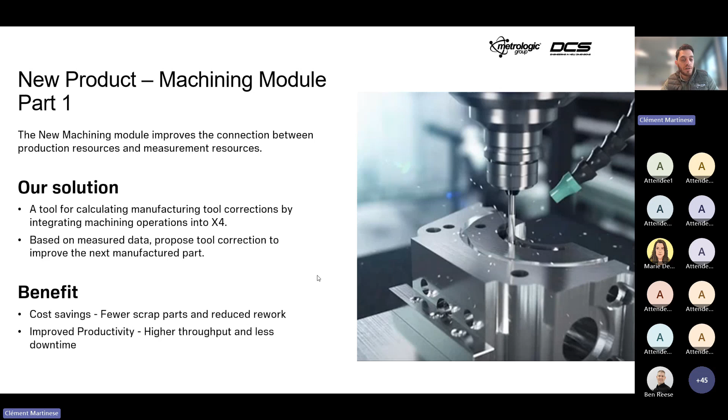Now the machining module. What is the target? The target is to improve the connection between the production resources, the CNC machine, and the measurement resources, the CMM. How do we do this? We are now able to define machining operations in Metrolog X4, called OP - it could be shouldering, drilling, planar facing - and we will be able to set the axis to apply this correction. Metrolog X4 will calculate the tool corrector to apply for the CNC machine for the next part. So the target is to improve your productivity and reduce the rework of your part.

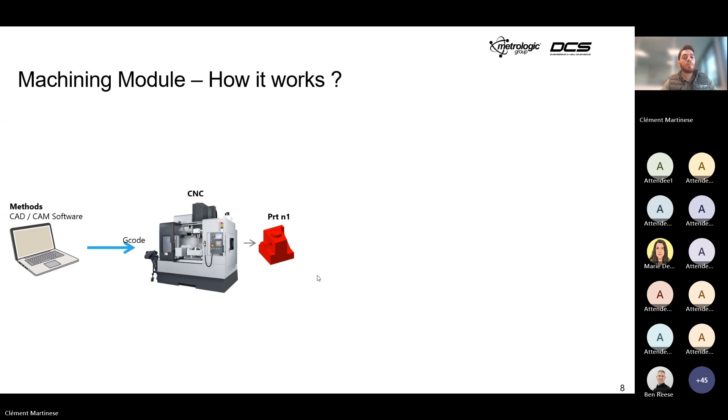How does it work? The first step is to create the part with the CAD design. We send all the information to the CNC machine. The part is produced - we have part number 1, in red. We have to control this part with the CMM and Metrolog X4, so we send all the information about the CAD design with the PMI, with the characteristics to control. The first part is bad.

It's not a problem. Now with Metrolog X4, we're able to calculate the tool corrector, maybe to change this surface with a shouldering operation, and send it - today manually - to the CNC machine to produce a new part, part number 2, with the tool corrector applied. The next step is to control part number 2 with Metrolog X4. At this point the part is good, and you can continue to calculate the tool corrector at any time and send it to the CNC machine to boost your productivity, with part number 3, part number 4, and so on.

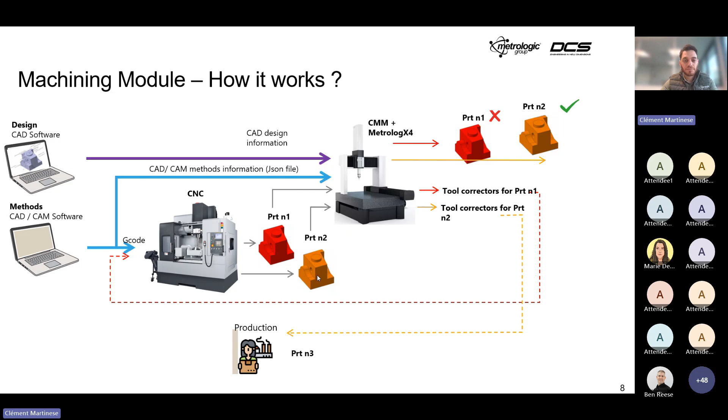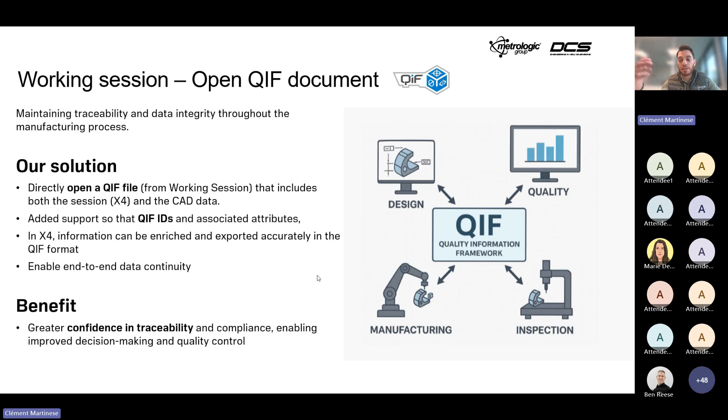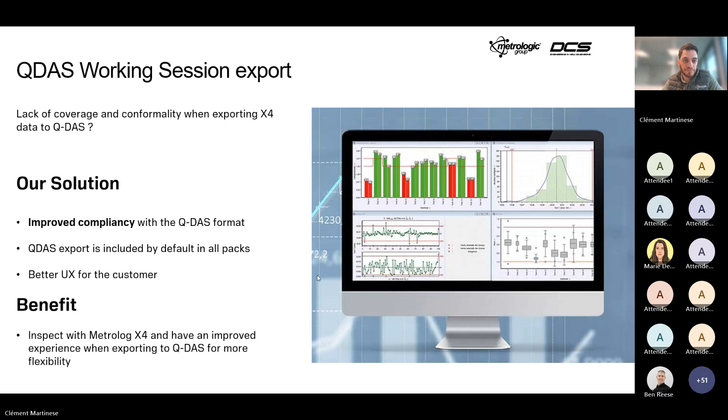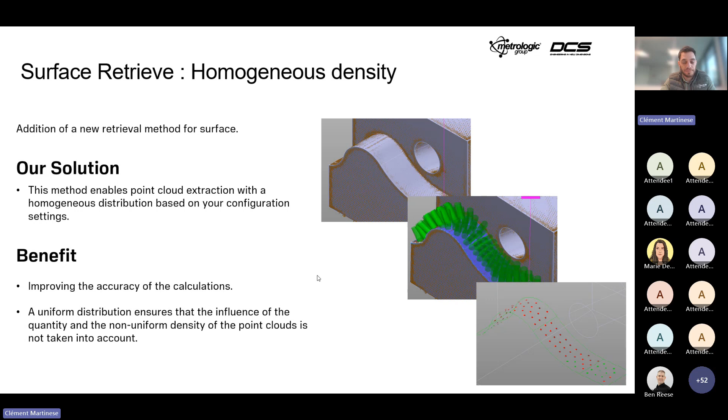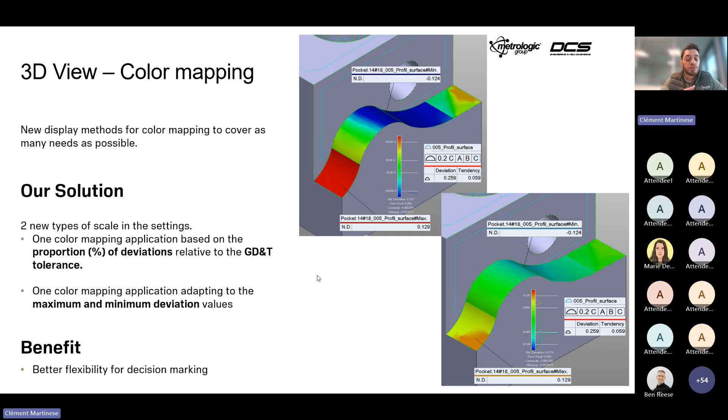Now about the color mapping, we had the possibility to select a new scale for the color mapping. Before, this kind of scale was available for the features only, but now we have the possibility to add it for the GD&T tolerance. So it's based now on the proportion of the deviation relative to the GD&T, as you can see in the first picture. The second scale is really a new one. When you want to identify the worst deviation of your tolerance, you can select a new maximum and minimum deviation value, and the scale will automatically set on the max and on the min, as you can see in picture number 2. So it's new flexibility for your decision making.

We stay on the color mapping, and now we add 2 new colorization modes in the settings. Before, in V23, we had the CAD colorization, the point colorization, the vector colorization, but now we merge the color mapping with the point, and the color mapping with the vector deviation, with the color mapping. So we just merge some possibilities into 2 new cases.

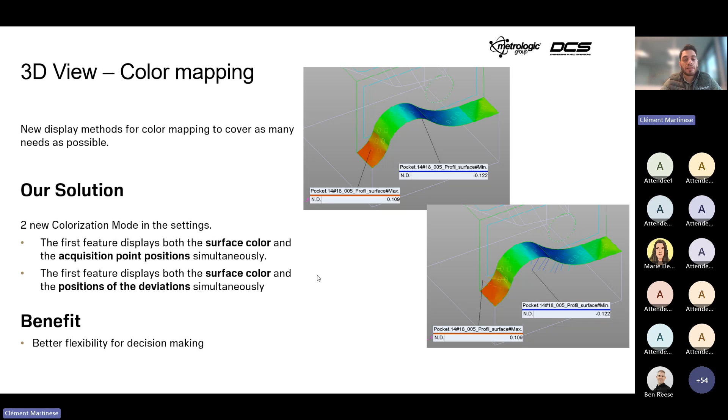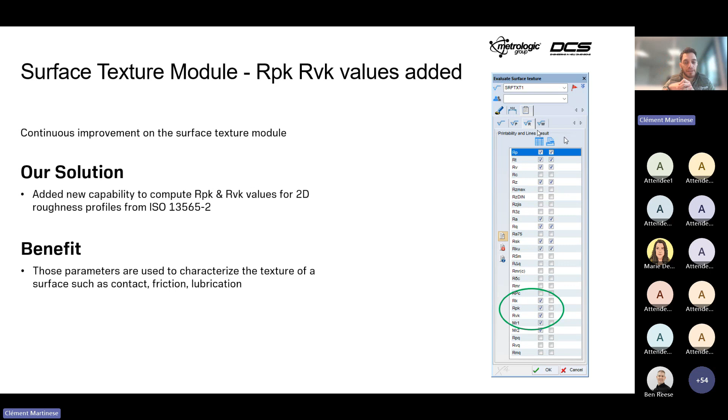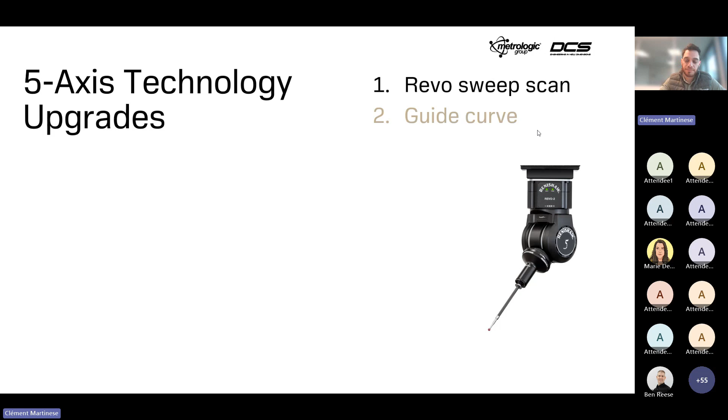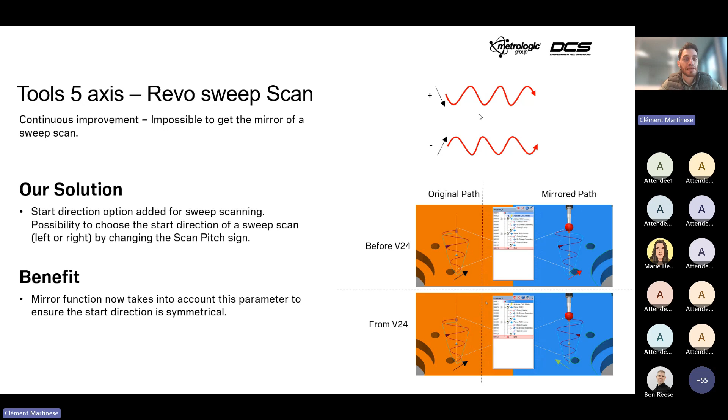Now focus on the 5-axis technology upgrade. We had no possibility to create the perfect mirror of sweep scanning trajectories before V24. As you can see on the first picture at the top, the trajectory was the same. But now, thanks to the pitch sign, it's possible to create the perfect mirror of the trajectory. It's a perfect way to process if you want the real mirror of the specific principal program. You can see at the top the version before V24, and below, the version from V24, where you get the perfect mirror of the sweep scanning trajectories.

For guide curves also, as you can see on the first picture, we have what we call the butterfly effect. It was complicated to generate perfect trajectories for blade inspection, for example. But now, thanks to the new algorithm, it's possible to smooth the probe movement, so you get a perfect trajectory, a perfect line for your blade analysis. It's useful when you want to create perfect trajectories, and you will remove what we now call inside Metrolog the butterfly effect.

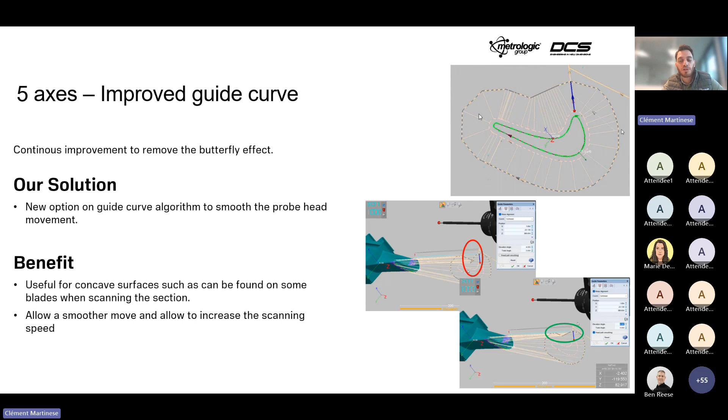Now some improvements about the hardware interface, and we'll focus first on I++ management. As you know, it's possible to connect Metrolog X4 with various types of I++ servers. But now we offer the possibility to select the server type. As you can see on the picture, the Renishaw UCC server - you can connect it, and you will get only the head possibility to connect to the UCC server, so the Revo 2, for example. But if you select the Zeiss protocol, for example, you will be able to connect only the VAST gold, for example, but not the Revo 2. So you have a filter according to the selection.

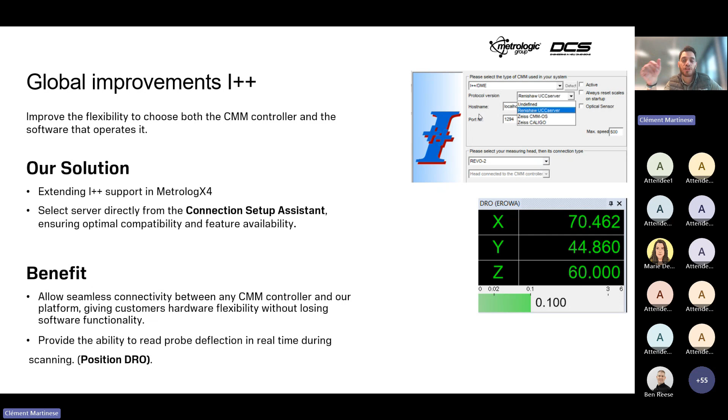We also now have the possibility to read the probe deflection in real time during scanning, thanks to the DRO. So it's a new possibility to adjust and see the real deflection of your probe thanks to the DRO.

About probe management now, always in the I++ context. As you know, before V24 it was sometimes complicated to create a tool with an I++ server. Sometimes you had to change the probe file XML, so it was a long process - first define, then change the probe file. Now, forget all those steps. You can define the tool directly inside Metrolog. You have better visibility of each probe depending on the tool, and the possibility to add a tool, define a tool, modify a tool in X4 without changing any information in the probe file.

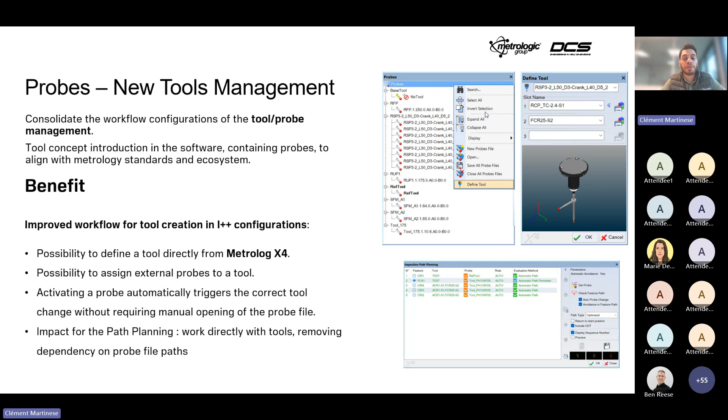We have benefits on path planning now with the I++ configuration. Before it was complicated to work with a tool, but now we have the possibility to work with it. So it's very important, and you have the possibility to create a perfect program thanks to inspection path planning with I++ configuration. It works like a basic protocol, for example what we use for global inspection in metrology with a head like the PH10.